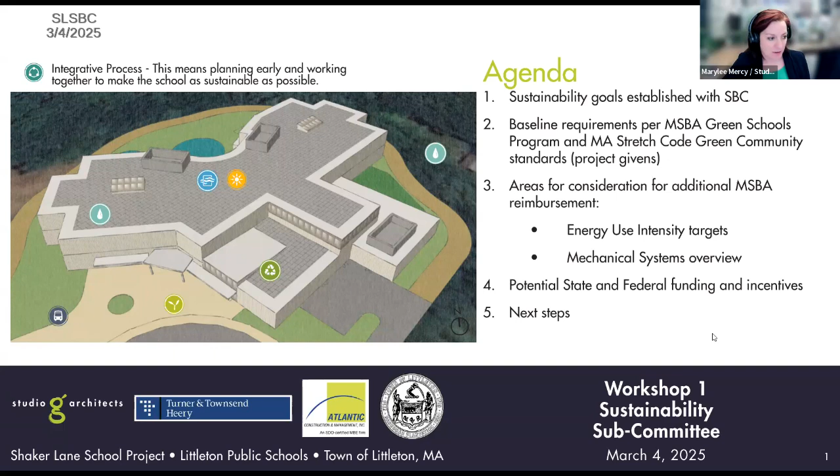So this agenda, we're going to be talking about general goals and cover what you're going to be getting in the new school, just as a baseline, a default. And then we'll be talking about what we can achieve beyond that, what is within reach. As Steve Moore put it before, however much green our green can afford. We'll get into some specifics about mechanical systems and about where some funding is coming from. So we already did introductions, but with you on our side is the architect as well as our mechanical consultant, Matt Woodward, as well as our green consultant who are helping us out with sustainability in general, as well as LEED points, and that's Eric.

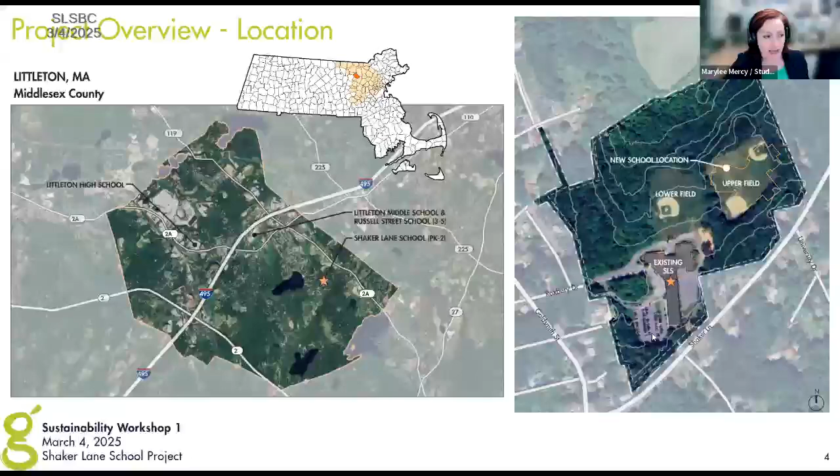Some more fun facts about the school. It is for 435 students in K-2, plus enough classrooms to accommodate 48 to 60 students in pre-K. New construction, 2 floors tall. It's going to include some ability for the community to use some of the spaces after hours, such as the gymnasium and the cafeteria, and it's oriented so that the lower field and the new fields down below will be really accessible to the community with parking and drive aisles.

We don't have a recent cost estimate, but the discussions that we're having today will contribute to discussions that we need to include in the information when we get our next estimate, and that is scheduled to happen in the summer.

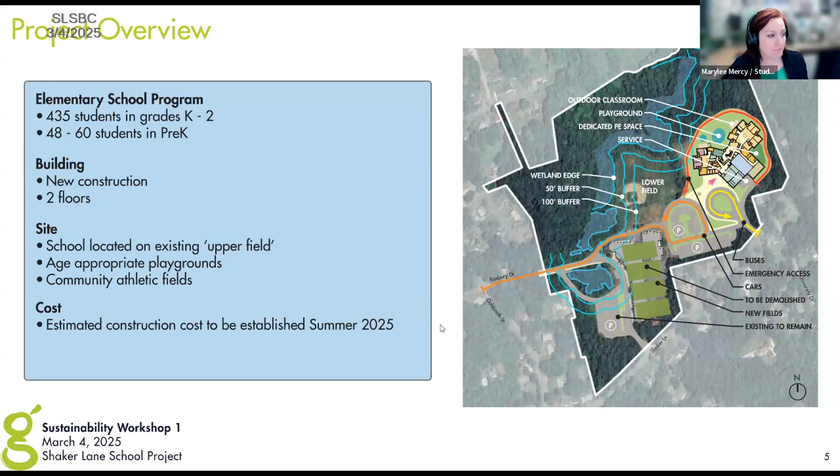All right, so the SBC has already done a ton of work in terms of looking at a bunch of different options, considering different sites. They established a long list of evaluation criteria. They applied that to each of the options as we looked at them.

First and foremost in the evaluation criteria was looking at whether or not it can meet the educational program of the district, as well as cost and being really responsible with the town's money. They also looked at the best site, location, community, and neighborhood, and they focused to some extent on sustainability, but tonight we're doing a really deep dive into more aspects of sustainability for the project.

All right, so getting into what the project will include already. So because this is getting funding from the MSBA, which is a state organization that gets its money from the sales tax and then contributes to various communities to help them build new schools or renovate old schools, we don't have exact numbers yet, but we have been estimating that the MSBA is going to be covering around 30 to 35% of the overall project.

So in order to meet the MSBA guidelines, the school needs to achieve silver certification in LEED at a minimum. It needs to meet stretch code standards, which some communities in Massachusetts are not stretch code communities, but luckily Littleton is, so we would be doing that anyhow. And the project must be both photovoltaic ready and electric vehicle ready, which means that we need to have all of the infrastructure there for the chargers or the solar panels to be installed at a later date.

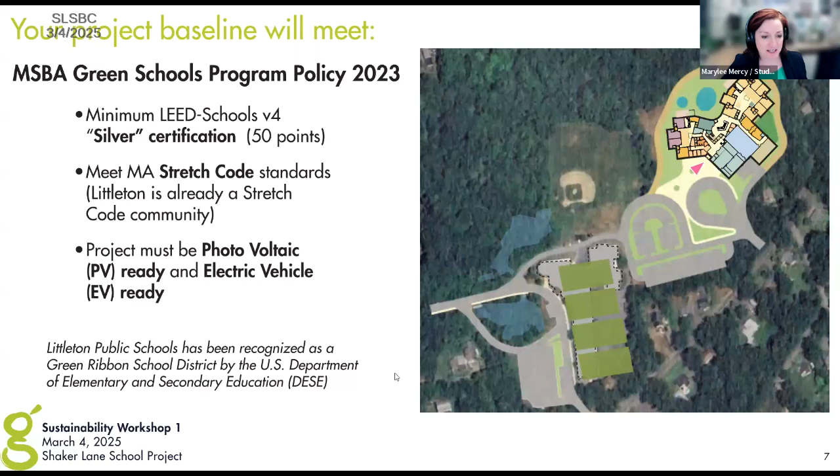So Littleton's looking pretty good on the sustainability front so far. So because this is at least a LEED Silver school, LEED requires us to look at a whole bunch of different categories that affect sustainability and affects the health and wellness of the building occupants. As we are moving through this process, we will be considering all of these different aspects, and many decisions are going to be baked in.

For example, we're already going to have efficient lighting systems. We're going to be considering the acoustics. We'll be looking at efficient systems in general and trying to reduce water where we can, and choosing healthy materials.

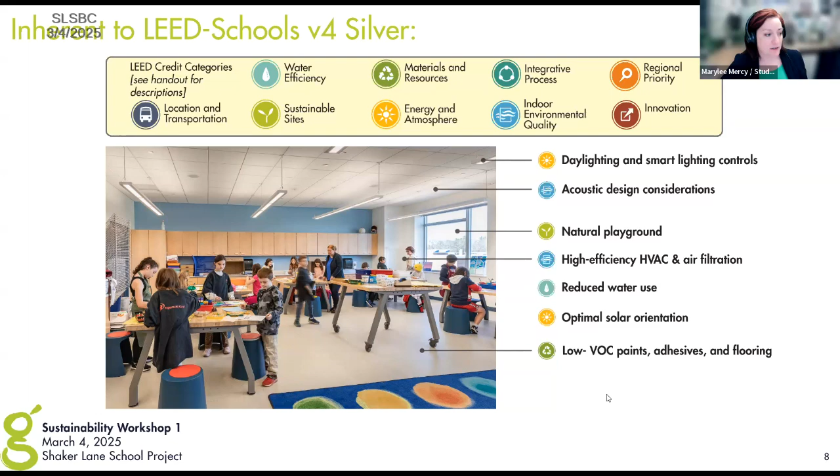So the reason I'm going into all of this is because over the summer, we did a community survey. You may or may not have seen it, but we got back a lot of responses where people mentioned that sustainability was important to them, and they were asking whether or not the school was going to include a lot of these things. So we wanted to let people know that many of these things are already baked in, things that people were asking about.

And a few other things people mentioned are things that they're open for discussion. Either they are easily achievable within the goals we're going to talk about tonight, or maybe they're a little bit more aspirational, but this is really the beginning of a conversation.

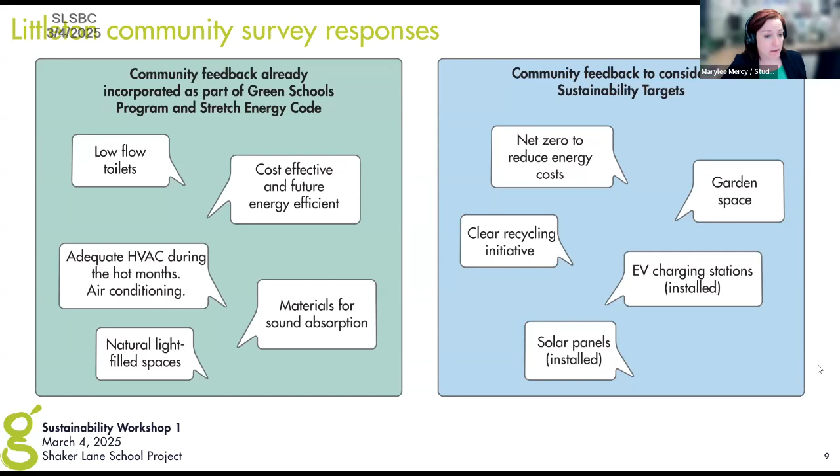So we heard from the community survey, and now we would really like to hear from you guys. And what does sustainability look like in Littleton? What are some comments you have on what I've already gone over? And what else would you like us to be talking about?

So I'm just going to say, if you had something to say, unmute yourself and chime in. Anybody? Steve, can you hear me?

Yeah, go ahead, Dave. Just as a point of interest, you mentioned Green Ribbon Schools. The Littleton School District, K through 12, has been designated as a Green Ribbon School. Yes, that's fantastic.

Anybody have comments?

So Marylee and I have both at one point or another either watched a recording of the Sustainability Committee meeting, or Marylee actually attended one. And what we are hearing is that the Sustainability Committee is interested in becoming involved in this project and others in Littleton. And we wanted to let you know that now is really the time.

None of these decisions have been made yet. And this is really a kickoff meeting, so to speak, in terms of sustainability. So if anybody from the committee has any insight on what the town goals in general are, or other things that have been coming up at those meetings, it would be great to hear those.

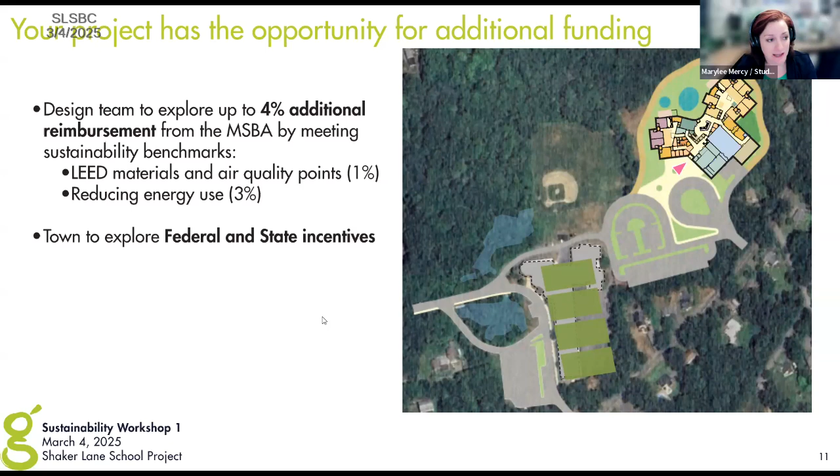And then a small percentage of this, there may be a possibility of getting incentives through federal and state. We'll talk more about that later, but we're not considering that to be a shoo-in for sure.

So first, the easy part, the low-hanging fruit is this additional 1%. This is LEED points, and we have to get at least 3 points out of all these categories at a bare minimum. And in order to get the 1% reimbursement, we need 2 more points, so 5 points total.

And these are all relatively simple things to do. A lot of them are things that we as architects just do as our best practices. So we anticipate easily getting this 1% reimbursement, and it would not incur any additional costs to the project. So we'll go ahead and get this additional 1%. Any comments on this?

Low emitting materials, talking like flooring, like VCT versus marmoleum, that kind of stuff. That's exactly right. Okay, yep.

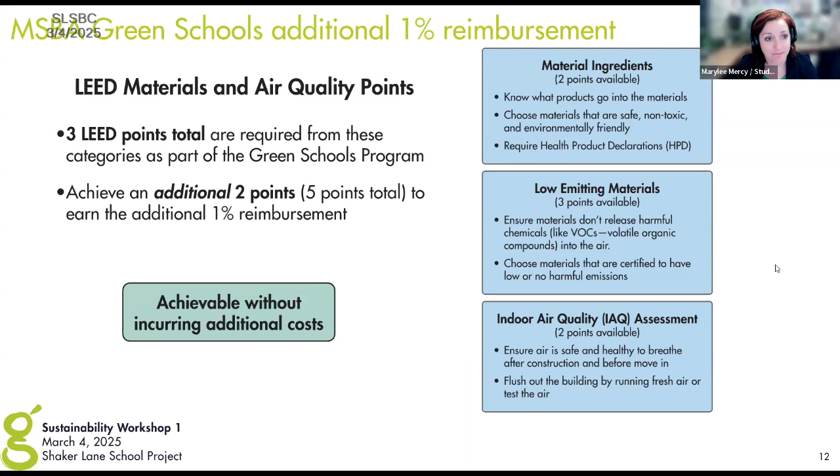Okay, all right. So now things get a little bit more complex, and I am going to pass it over to Eric to get into the next few slides. Sure. Again, what we want to do here is just kind of help you understand some of the lingo that we'll be using.

And you'll see us asking us to set targets towards, and one of those is the EUI of a building, which is the energy use intensity. Basically, it's simply how much energy does the building consume, less anything produced by renewables, over the square footage, which gives you this EUI value in kBTU per square foot per year. It's a measure of the performance of your building.

And what we suggest is teams set a target early in the design, such that the design team has an understanding of what they're designing towards.

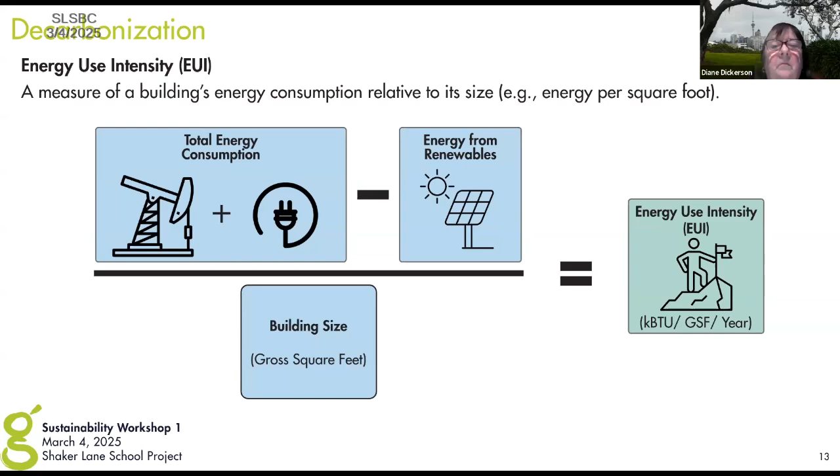We will be doing some energy modeling, which is computer simulation of building performance, which will help us understand what the EUI will be based on different design configurations: more aggressive envelope, different HVAC systems, lower flow fixtures. All of those design considerations that may go into the building have an impact on the EUI. So we want to make sure everyone understands that terminology and is starting to think about how aggressive do we want to be at this school.

So setting an EUI target - this is all conceptual at this point, right, because we don't have any design or modeling complete - but a standard existing school may be around an EUI of 75. But now with the more aggressive energy code in Massachusetts, even just that stretch code, it's going to drive that EUI number down significantly.

On the left, with all the bulleted lists color coded to relative impact of energy reduction, are some of the strategies we could use to help drive down the EUI of a building. Now, as Marylee said, the baseline MSBA requirement is to meet that Massachusetts stretch code requirement, but there's that additional 3% reimbursement for being more aggressive.

There are some particular requirements to meeting that opt-in that we will talk about in a moment. But what you see is that meeting those more aggressive criteria will drop the EUI of the building to around that 25 number target. That's in line with a lot of the MSBA school projects that are in design or in operation, new schools in operation now. So certainly an achievable target.

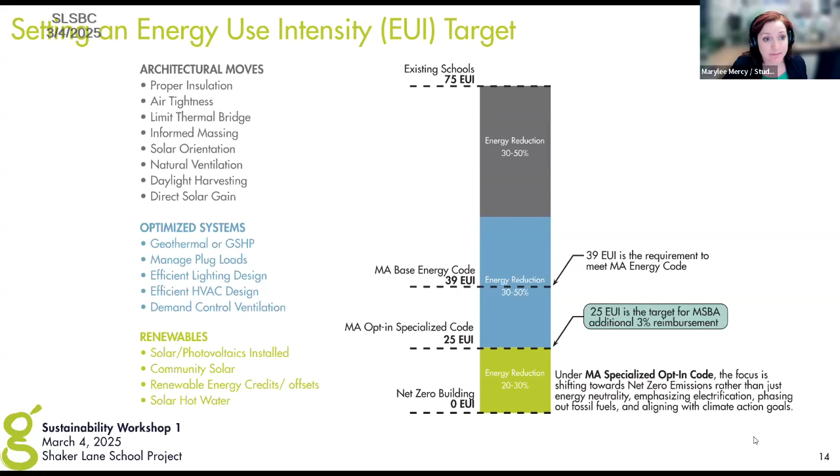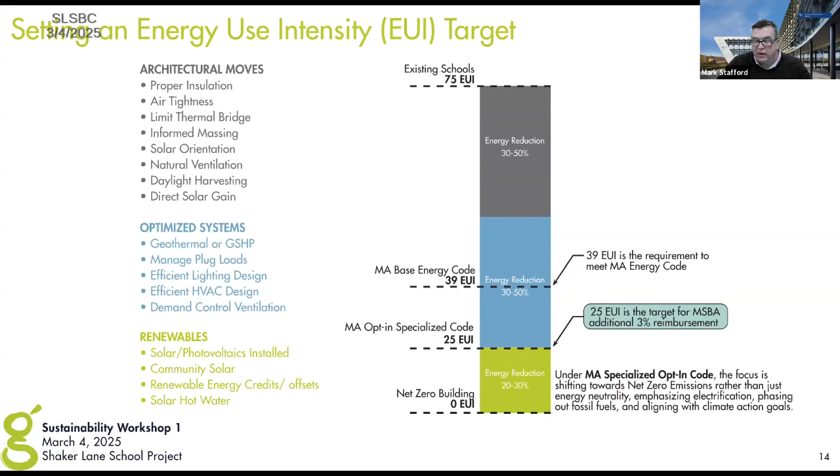Eric, great to see you again, thanks for all that information. I just want to say quickly, EUI is like the MPG for your car - miles per gallon, the efficiency of how you can make your car get better with the use of gasoline. That's kind of how to think about EUI. Yeah, and similarly, you could have a predicted EUI number, and your actual mileage may vary depending on how you actually operate the building. Exactly, thank you, that's a good analogy.

I like it. Any other questions before we shift on? Yeah, my only question is, how much money do you have to spend to get this 3% reimbursement? Well, that's good, we're going to talk about that as we move forward. Part of what we owe you in this phase is an assessment that will help you realize the all-in costs of different design configurations, particularly the HVAC system options under consideration.

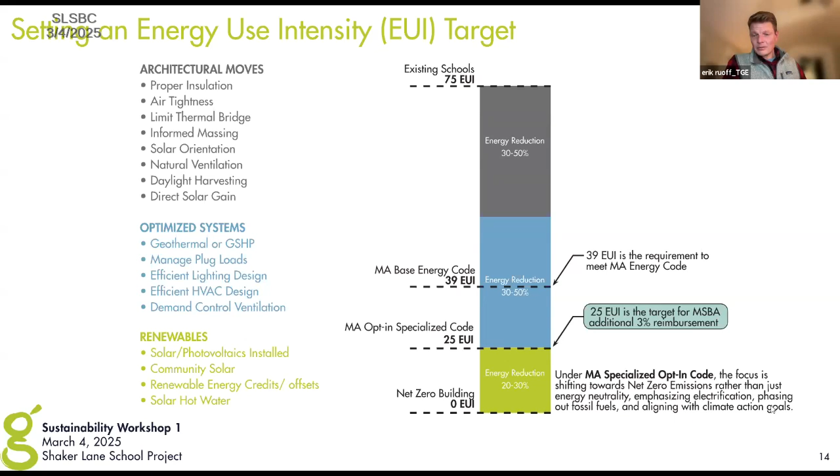So stay tuned for more on that in a moment. All righty, that's a pretty good segue into the next slides. So now I will pass it over to Matt to guide us through these. Yeah, I think this slide is a lot of what has already been touched on. Basically, in an ideal world, I think everyone would go for the additional 3%, that's extra money back to the town, with the obvious caveat, as Steve points out, that everyone asks: okay, how much does it take to get there?

Similar to a car, it's very easy to buy a cheaply made car with a crappy engine, and it costs a little more to get one that is very fuel efficient. So basically, if you're talking about the 3% reimbursement, we're talking exactly what you're talking about, Diane, with that opt-in specialized stretch code. Meeting that is effectively the additional work being done to get that 3%. It's going from stretch code, which is a requirement for the town and for the MSBA, up to the opt-in code. There are a couple of ways the code is written that would allow us to get there. Basically, it boils down to one option being really an all-electric option where you would electrify the building. As Eric mentioned, that's really largely the overarching trend. And I think, to Charlotte's point earlier about following the guidance from other towns and communities in the state, that would be the electrification option.

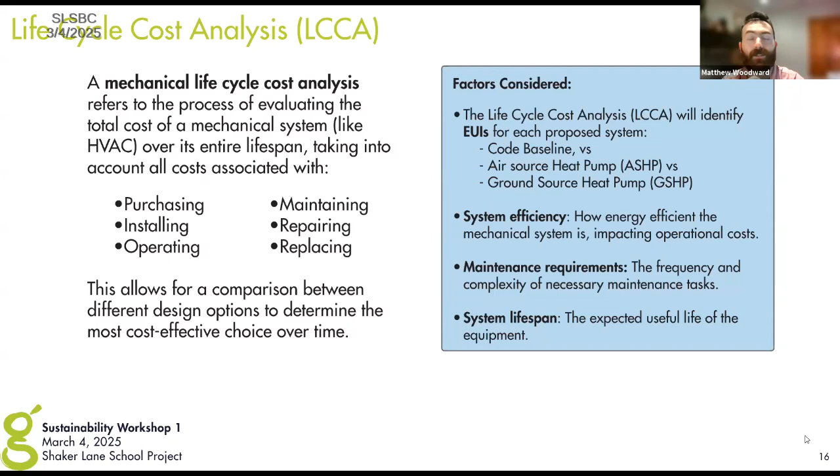It's going to be looking at the upfront costs, operating costs, replacement costs over a 50-year anticipated life of these systems and the building as a whole, and we'll be comparing that to a code compliant baseline system, and have a report issued indicating what systems effectively have a good payback, return on investment, what has the best EUI in terms of energy performance, and what really makes dollars and cents logic.

So that being said, we have really 3 options currently, but including a 4th one here on this slide, and we'd like to get some feedback from the committee here. Basically, what I'm looking for as a takeaway from this is a blessing of these options to be studied. I could spend 2 hours talking about this, but in the sake of time, we're gonna talk at a very high level, and if anyone has specific questions, feel free to jump in and ask.

Basically, the first option is probably the most different from the others. It's an air source heat pump system called VRF. Basically, what happens is you have refrigerant flowing through the building to air conditioners effectively in each zone, and they also do heating. There's a bank of condensing units with coils and fans on the roof, and the refrigerant going between the two carries the heat and cool throughout the building to each space, rejecting the heat into the exterior in the summertime, and pulling the heat from the exterior and pumping it into the school in the wintertime.

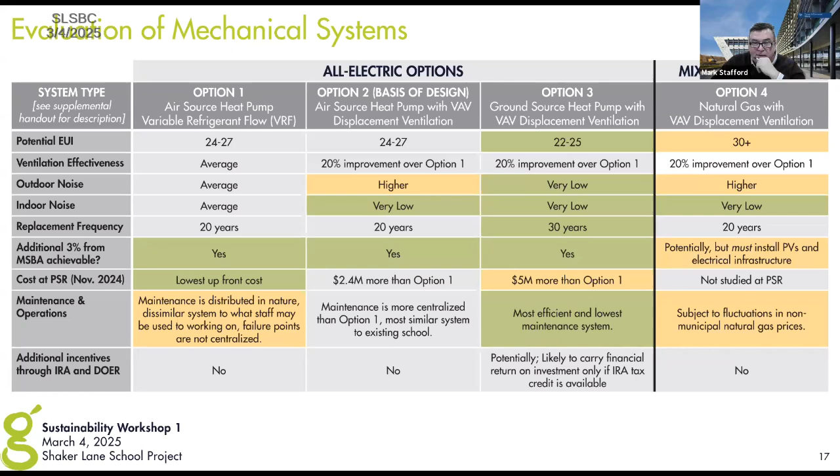Hey Steve, I think we used option 2 on the library and the senior center. Yeah, okay. So I think that's kind of the, that would be my recommendation. Good feedback, Steve, thank you for that.

But can, there would be an option to save money if we didn't want to go all electric, obviously, and take option 4. So even though it's in the estimate now, yes, there's value engineering there, if we wanted to.

So, sorry Steve, Mark, do you want me to answer your question here still? Yeah, and if we don't have time, maybe you can just, I can take it offline with you. I'm happy to write an email and distribute it to the group. Yeah, maybe do it that way, I think, instead. I don't want to waste the time now. All right, I'll do that. That's no problem. I'm the one that manages the maintenance, so I want to make sure I understand what it is.

Sure, and not to rush through the last option here, but my ask to the group is, we've talked about wanting to align. It sounds like there's a general sustainability committee intent to align with overall trends and other state trends in terms of electrification. Do we want to entertain the mixed fuel option? Should we study the mixed fuel option in terms of having natural gas, or is that something we just do not feel is appropriate for the community?

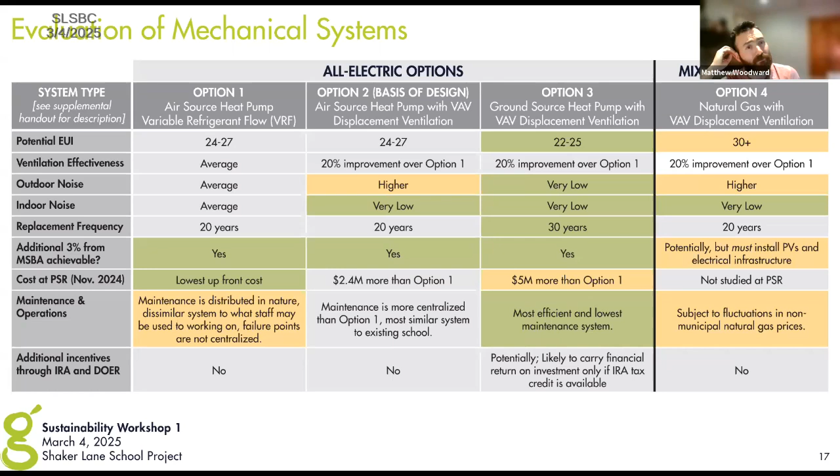Are the heat pumps with the VAV able to meet the demand of a 5-degree day for a week? Yes, for 5 degrees, definitely. 5-degree is very likely going to be our design condition, in terms of what the code requires us to meet for local weather data. It's a very common question that's asked. Often these units are rated down to 0 degrees and even lower on some of them.

With the air source option, we would suggest having, and we'll price this in our life cycle analysis, an electric boiler for backup exclusively. It's not particularly efficient, but it is still electric, and would help you out in a freeze protection situation if you ever lost multiple modules from your heat pump, or it was really -10 or something, and you just had to limp through for a day or two. That would assist as part of the design.

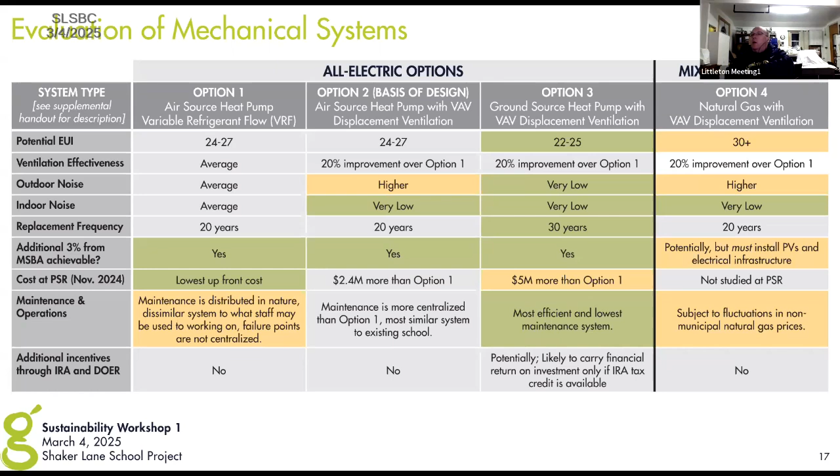So you're talking like a boiler tucked away in the basement utility room as a backup to this system? Yeah, backup and supplementing on a day when it was just really, really cold outside. I want to make the note that it's an electric piece of equipment - not, since you mentioned high efficiency, gas.

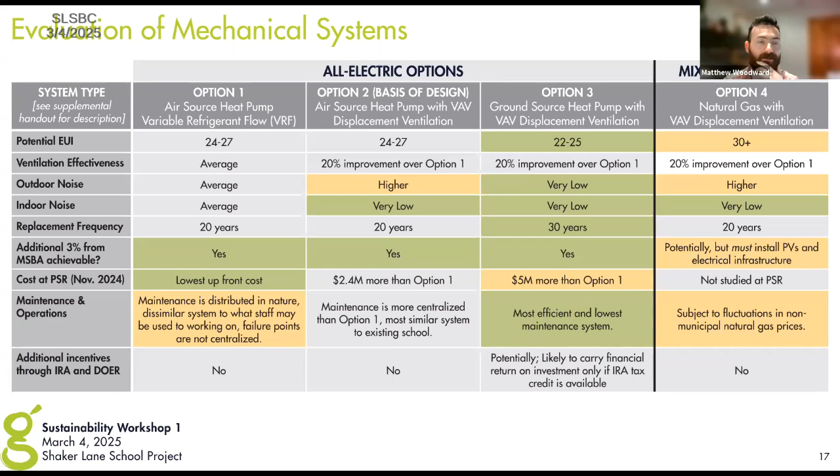Okay, so I think just one more question, and then we want to talk very briefly about a little bit more funding and then what's coming after this. So Diane, you have your hand up.

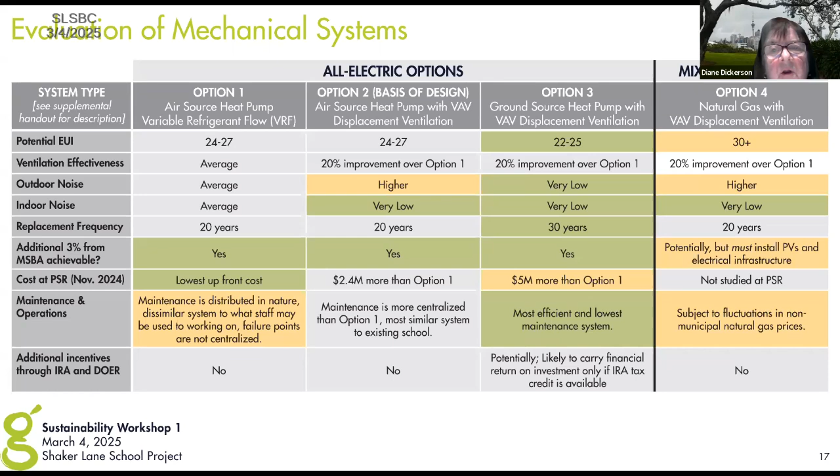Just a quick comment. Someone asked if that also meant no gas in kitchens and stuff. I believe that is the case from everything I've read. But the new senior center is all electric, and it's a completely electric kitchen operation, all commercial kitchen type design as well. That's correct, yep.

All right, thank you. Eric? Aside from the fact that they don't cook anything at the senior center. Well, I'll just tell you right now, we do a lot of cooking at the schools, so...

Steve, we have a kitchen consultant who can really talk you and your staff through all of the options available and answer any questions or concerns they might have about making the switch to electric, if that's what's decided. I don't have a problem with it, I just want to make sure we understand what we're getting ourselves into. Look, I'm the first one to be out there saying we should go as green as possible, go all electric if we can within the budget. I'm all for it.

Great, so running low on time here, so this is quick. We certainly want to take advantage of any available incentive dollars that are outside of the MSBA process. There are some available state incentives depending on the HVAC equipment selected that we can take advantage of. As Matt mentioned, there were quite favorable incentives available through the Inflation Reduction Act, the IRA, that given the current state of affairs are no longer something we can count on. We can't read the future. They were still passed by Congress and should have to be canceled by Congress, but that's not exactly what's happening currently. So we have to be cautious, and we will be, but we'll continue to explore the potential incentive options available for the project.

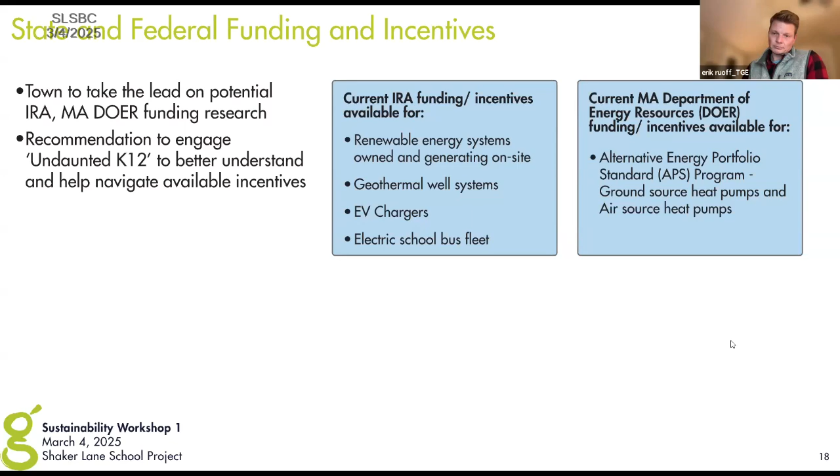And so some of these incentives wouldn't apply until later, once a building gets started anyway, is that correct? Correct, most pay out post hoc, right after everything is installed and operational. Okay, so we're talking 3 or 4 years away, so maybe the environment changes by then. All right.

Thank you all so much, everybody. This was a really excellent conversation. The next SBC meeting is March 19th. I'm sure you'll all be thinking about this, digesting it, speaking to one another. On March 19th, we'll be doing a check-in with you to see if you have any preliminary preferences or thoughts on how we want to proceed. Then we'll have the second workshop where we'll have the life cycle cost analysis information, and then we can really have all the information we need to make a final decision.